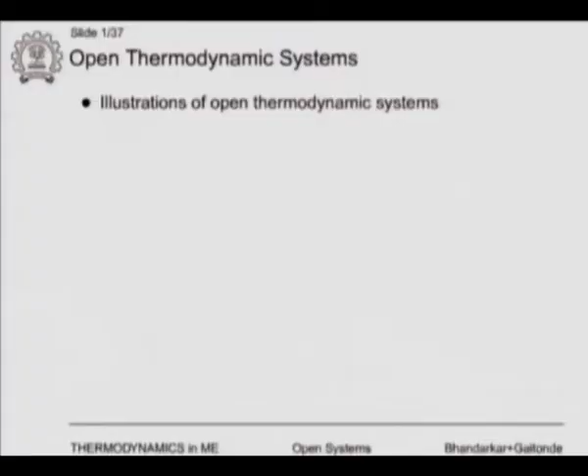Initially we will have a few illustrations of open thermodynamic systems, then we will take a specific system, just one system where we will study and derive equations, and then we will come up with a very general equation which we can use later. Finally, we will apply it to typical engineering systems like turbines, boilers, etc., and finally come to the numerical exercises, those problems.

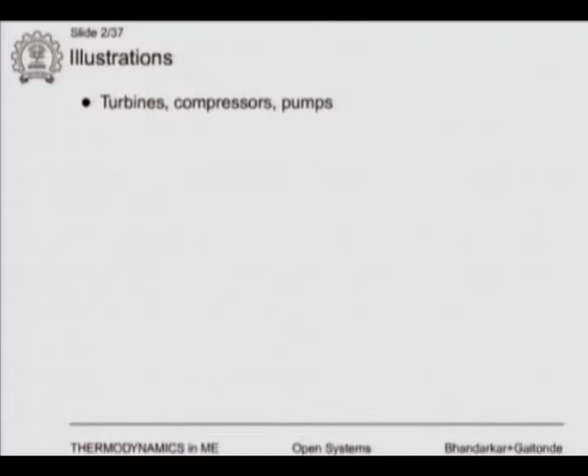So illustrations now. Typical examples: turbines, compressors, pumps. These are used in power plants, in refrigeration industries, fans, boilers, condensers, heat exchangers. All of these are used in various engineering applications. Power plant is a typical example which will have nearly all of these: boilers, condensers, heat exchangers.

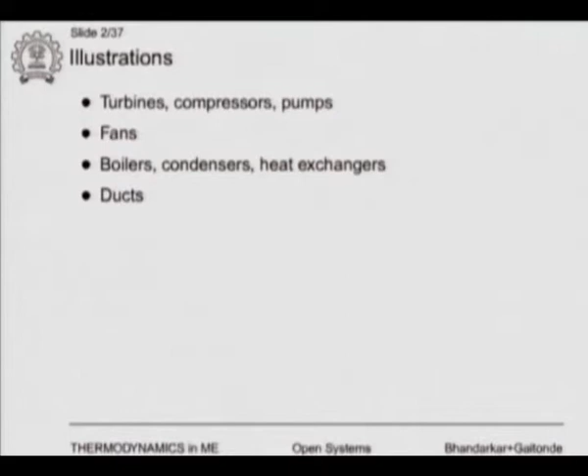Ducts, rooms and buildings, and then other systems like car and human being. These are also, you can consider as open systems, but we will be primarily looking at the first four of these, because these are more typical engineering applications, and we will see how to apply our analysis to these kind of systems.

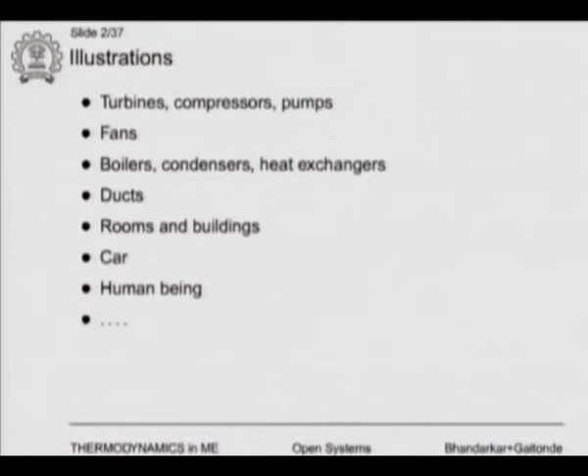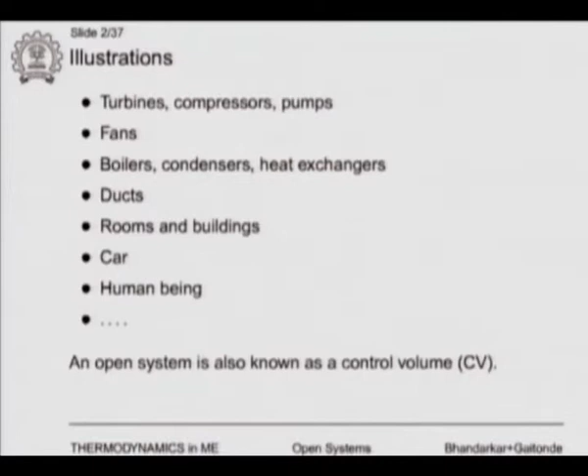So in normal parlance, an open system is also called a control volume, and you must have seen such a thing in fluid mechanics, where people would draw a sort of control volume and show lots of inlets and outlets out of this control volume.

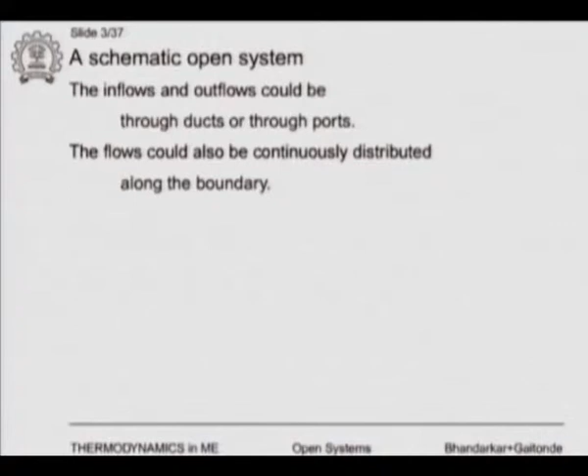So in a typical open system, we will see that there are inlets, outlets, or it could be you are probably analyzing a particular volume in space, where all through each boundary there may be inflow and outflow happening. So this is what we would typically call a control volume.

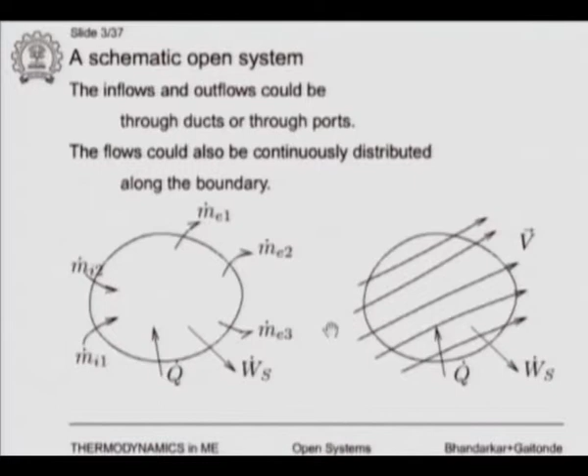If I show you a diagram which is coming from, which you probably would have seen typically in fluid mechanics, some kind of arbitrary shape, we can draw a lot of mass coming in and out. M dot I1, m dot I2 are inlets, m dot E1, m dot E2 are outlets. There could be work, there could be heat transfer, or the whole boundaries we could have inlets and outlets. This is what a typical control volume would look like.

So if this is what a typical control volume will look like, what we are going to analyze is a very simple system, and we will see that this will work for us for most of our applications. This is a very simple open system that we are going to show, a control volume.

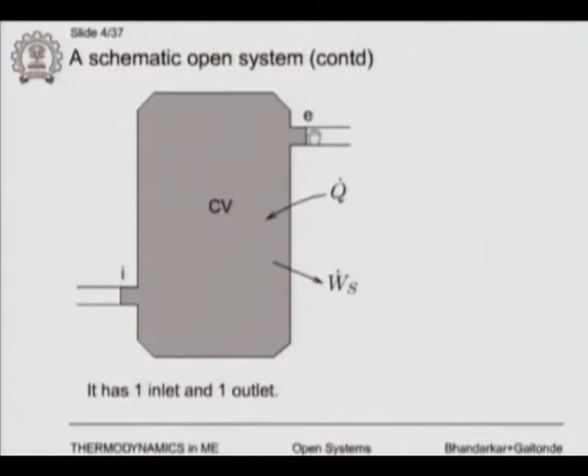So what is shown on the slide right now is just a system with one inlet and one outlet. All the shaded area is what is called the control volume, and it has been named CV. Where you can see the port mentioned I, that is the inlet, and where it is mentioned E, that is the outlet. We are also showing that we can have heat transfer and work transfer, the Q dot and W dot.

So let us look at the situation now. The control volume would have, of course, a volume V, a mass M, an energy E, and entropy S. These are properties of the control volume, and as you can see, we have put in the brackets the time t, because with time all of these could be changing. So volume, mass, energy, entropy, all these are functions of time.

Then we have the fluids at the inlet and exit, and we assume that they are in local equilibrium. That means they will also have their own properties which can be clearly defined. So the fluid at the inlet will probably have its own temperature, its own energy, its own entropy, and they can be well defined, and that is the case even with the exit fluid.

Okay, and we are going to assume that the situation at the inlet and exit is one dimensional and everything is uniform across a cross section.

Now if you have more than one inlet and outlet, you can model each of those, or if you have continuous inlets and outlets, what we normally do is take small areas on the surface, and each of these is usually modeled as 1D, and it suits our purpose to do it this way. But right now we have a situation with only one inlet and one outlet, and what we model is that everything coming in is one dimensional, everything going out is also one dimensional.

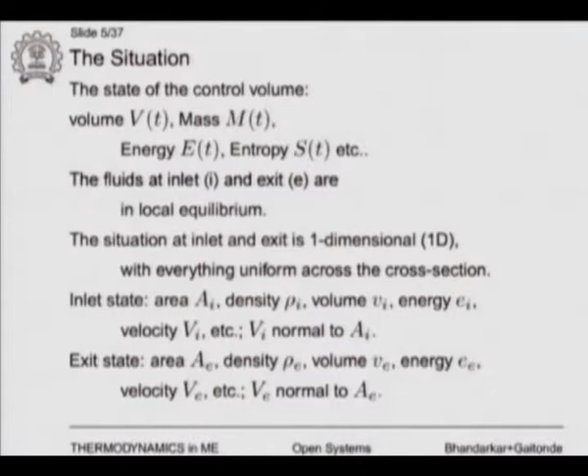And for the exit, we will have exactly the corresponding properties for the exit, that is the area AE, exit area, and then the density, specific volume, energy, velocity, etc., which correspond to the exit properties. So these are as far as the system properties are concerned.

How is it interacting with the surroundings? We will have, as with any system, some heat transfer interaction with the surroundings, and there may be some work transfer interaction with surroundings.

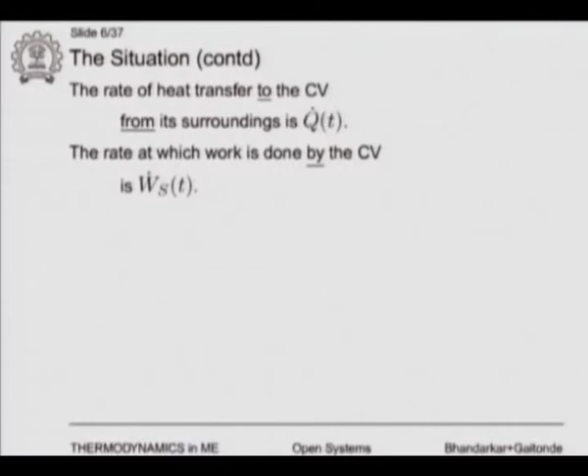So the work transfer that has been displayed on the slide has a subscript S. Typically this stands for shaft work, but we will say this is all the kinds of work that is done by the control volume, which includes maybe expansion, maybe stirrer work, etc., but it does not include the work that is required to push the fluid inside at the inlet and to push the fluid outside at the exit. So WS includes all those components of work, and we require some work to push the fluid inside the control volume and some work to push the fluid outside the control volume, and we will see how to take care of this. Otherwise W dot S includes all other kinds of work which does not include these.

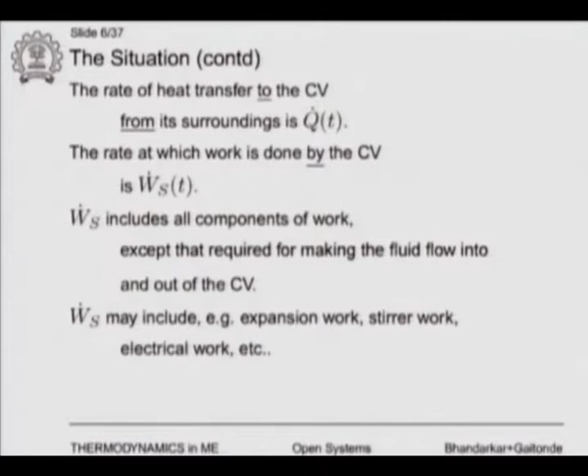The amount of volume or the amount of mass in these two plugs need not be the same. It is just that this is the exact amount. Let's say we are monitoring the control volume for a fixed amount of time delta t, then this is the exact amount which will come in that small delta t time. So the inlet plug corresponds to the amount of mass which will come into the control volume in the small time delta t, and the exit plug corresponds to the mass which will leave the control volume in the small time delta t.

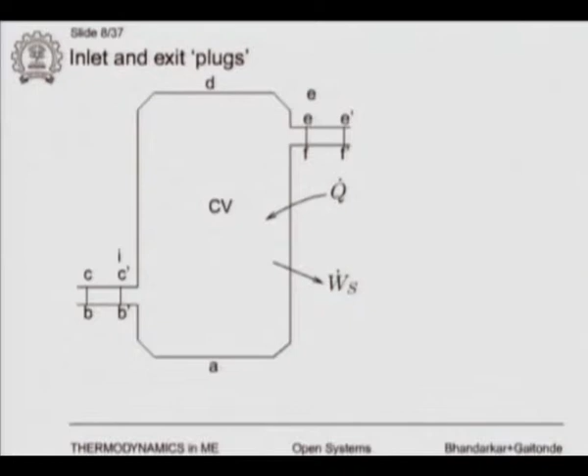We have still shown q dot and w dot in this figure. Now we are going to put alphabet labels so that we can define what the system looks like at different points in time. So you will see that there is a system which let me now shift to the paper. I will just show you what we have put here.

So this is the inlet plug here. We are naming, we are going to include this much part along with the CV at time t. So that is what is being done here. So this CB is the start at time t, and similarly EF is at the start of time t. So basically we are going to consider a system that not only includes the control volume but also the plugs.

So at time t we will choose the control volume plus the inlet plug and not the exit plug, and at time t plus delta t we will no longer have the inlet plug but will have the outlet plug. So how does this look like?

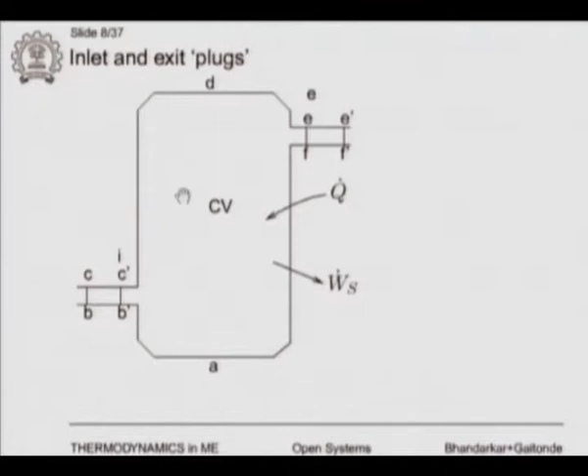So at time t we had the mass in the control volume plus the mass in the inlet plug. At time t plus delta t, see this boundary here, BC gets pushed to B dash C dash, and an equal amount of mass is getting pushed from EF to E dash F dash.

So what we have is that the mass in the system at time t, the system includes at time t CV plus the inlet plug, that mass is the same as the mass in the system at time t plus delta t, and the system at time t plus delta t is exactly having the same amount of mass.

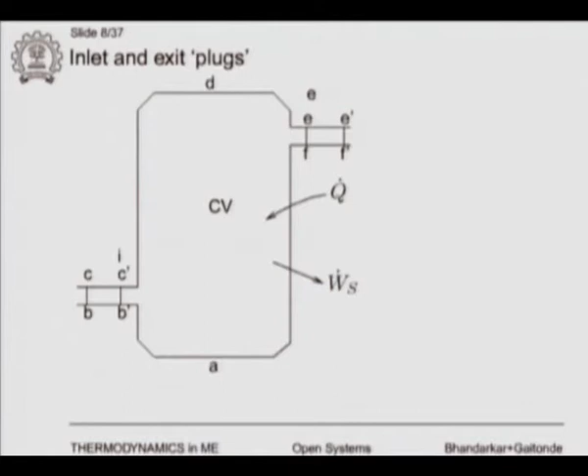It is basically, we have considered a system, when we consider A, B, C, D, E, F, we are considering a system across which no mass is flowing, because all that has happened is that BC, as if there is a piston at BC which has pushed the mass up to B dash C dash, and an equal amount of mass is coming out from EF to E dash F dash at point t plus delta t. So this is what has happened.

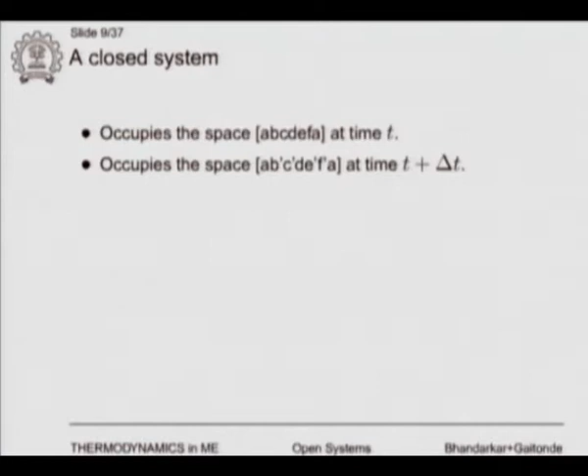So basically this closed system occupies the space A, B, C, D, E, F, A at time t, and it occupies A, B dash, C dash, D, E dash, F dash, A at time t plus delta t. So no mass is flowing across the boundaries of the system at this place, this is a closed system, and we are going to apply our normal equations, the first law and second law, to the closed system, because we know how to do it, and we will see how we can now correlate this to the control volume, which is the volume without the inlet and the exit plug.

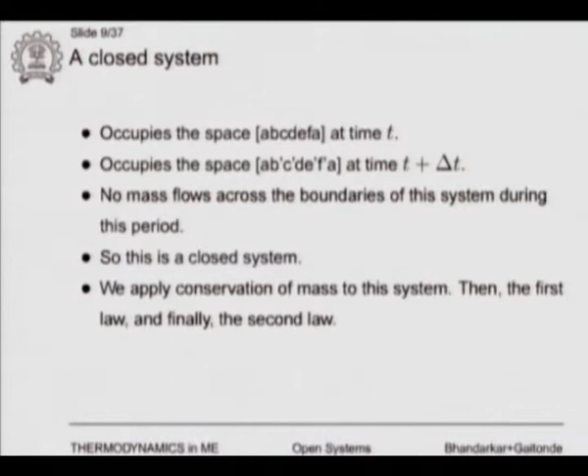So this is a closed system, as I said, and we can apply not only the first law and second law, but initially we will have to apply the conservation of mass to the system, and we will see how this is going to happen.

So just to refresh, this is the system in the initial state, which is A, B, C, D, E, F. So everything that is shaded, which is the control volume plus the inlet plug, this is the system at time t. And if I see how what has happened at time t plus delta t, all that has happened is B C has been pushed to B dash C dash, and E F has gotten pushed to E dash F dash, and the mass within this has remained the same.

No mass is crossing any boundary. In fact, it is just the same mass which we are analyzing. So this is what it looks like at t plus delta t. You can just see what has happened, you have pushed from here to here. That is all that has happened between the initial state and the final state. So this is the initial state and this is the final state, and this is how the system looks at time t plus delta t, and q dot and w dot s have been drawn as before.

So now we will look at the process and interactions.

The mass, we can say, is put into the system. At time t it is Mt, and at time t plus delta t it will be M at t plus delta t. Of course the mass is not changing, but we are just denoting the quantities in the system, which are mass, energy, volume, entropy, existing at time t and at time t plus delta t.

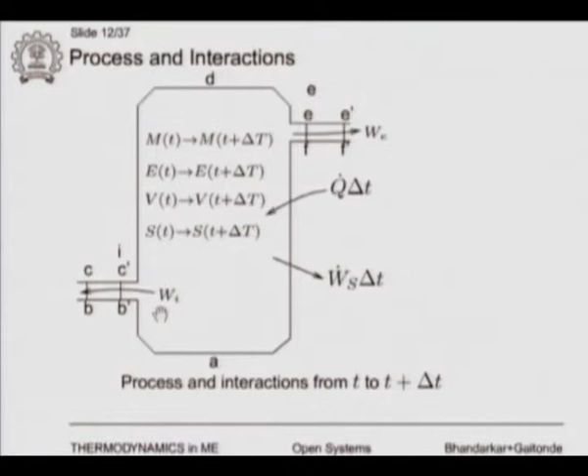I think now I will just shift to using the whiteboard.

So if I look at the conservation of mass, let us see what has happened. We will look at conservation of mass. If I had looked at the system, the system is...

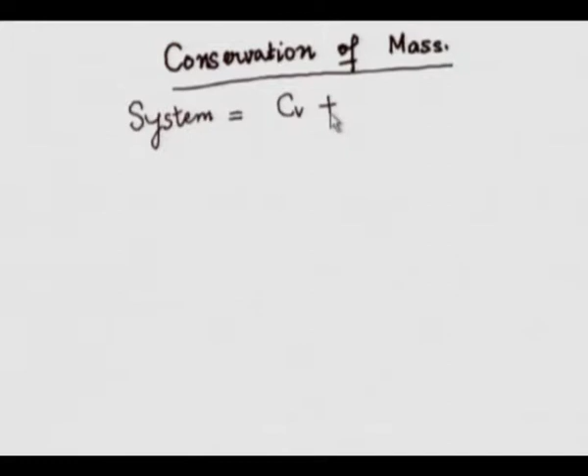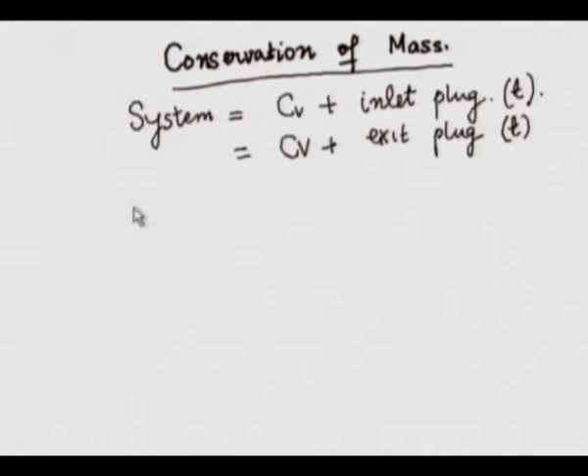the CV plus the inlet plug at time t, and it is CV plus exit plug at time t plus delta t. So the mass in the system, M system at T, is actually equal to M system at T plus delta T.

That is because all that has happened is really the inlet plug got pushed into the system and an equal amount of mass got pushed out, and it is really the same mass, and it was a closed system as far as we are concerned. If we consider that as a system, really no mass has crossed the boundaries, and what has really happened is that the mass is the same.

Sorry, there is a mistake here, I should have written T plus delta T. So M system at T is nothing but M of the CV plus M that exists in the inlet plug.

And M system at T plus delta T is just MCV at T plus delta T, plus M which exists in the exit plug.

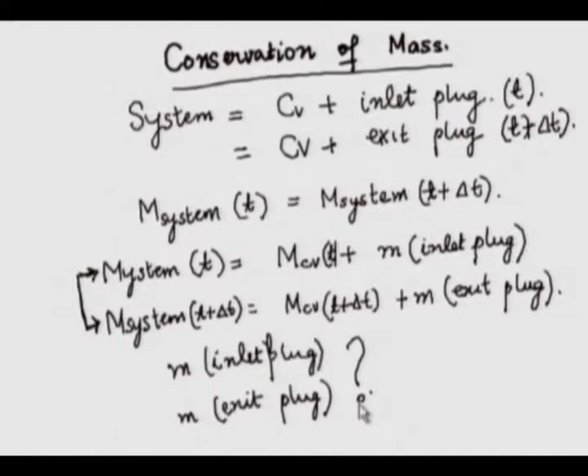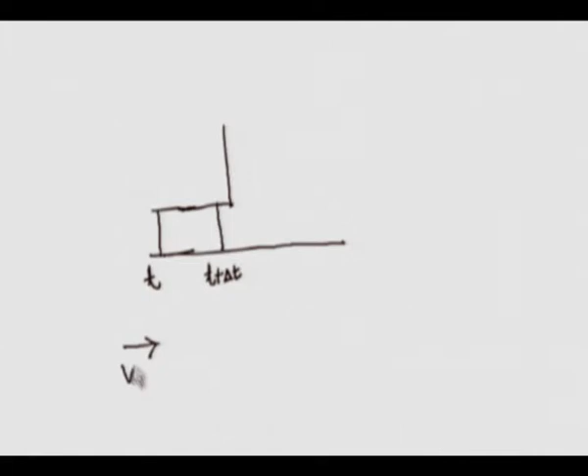So if I just want to look at what is happening at MCV T and MCV T plus delta T, I should just figure out what is M in the inlet plug and what is M in the exit plug. So if I look at the inlet, I had T and T plus delta T. The fluid was entering at a velocity Vi, and the area here is Ai.

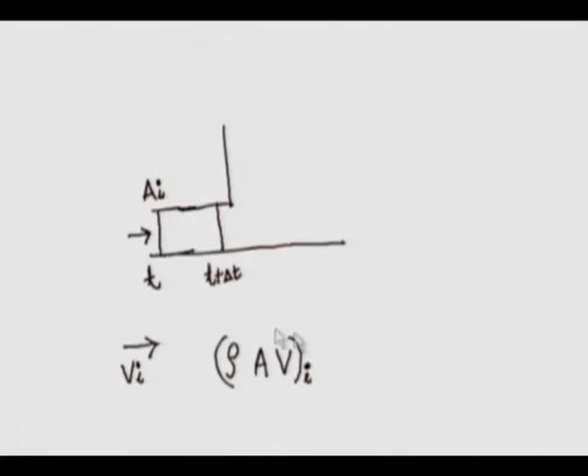So what has really entered into the system is rho multiplied by A multiplied by V, all at the inlet, and this is the rate at which the mass is entering.

What you can say is that this cylinder's length is just V times delta T, where this is Vi, and the volume of the cylinder is just Ai times Vi times delta T, and the mass in the inlet plug is just rho I times Ai times Vi times delta T. So this is the mass at the inlet.

Similarly, I will have a mass in the exit plug which will be just rho E multiplied by Ae multiplied by Ve multiplied by delta T. So, this is what is really happening at the inlet and exit.

So, if I say what has happened here, let me go back to the document now. This is the conservation of mass. So, I am just telling what I have already said. M system at T plus delta T is M system at T.

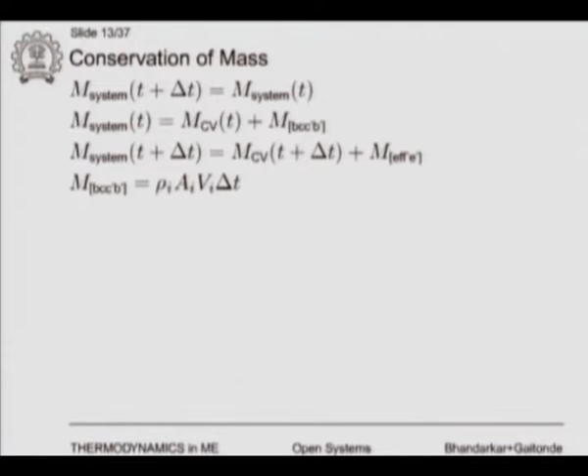M system at T is just the mass in the control volume CV plus the mass in B C C dash B dash, which is the inlet plug, and M system at T plus delta T is just the mass in the control volume at T plus delta T plus the mass in the exit plug. And I have already told you that the mass in the inlet plug is just rho A V at the inlet multiplied by delta T. Similarly, I can write a similar expression at the exit.

And if I see what the first equation is, the mass in the system is the same at T plus delta T and T. So, I will just equate: this is mCV at T plus delta T plus rho AV delta T at the exit. This is the mass in the system at T plus delta T, that is the same as the mass at T. So, this is what we have just written.

And if I just write an expression for mCV, all I do is divide by delta T. So, I am getting an expression only for the mass, the change of mass in the CV. So, mCV at T plus delta T minus mCV at T divided by delta T is just rho AV calculated at the inlet minus rho AV calculated at the exit.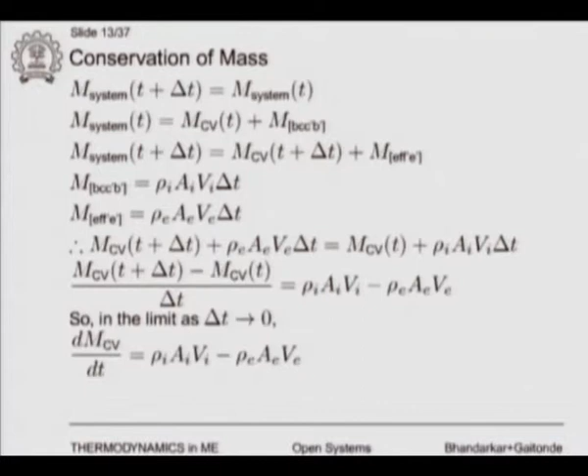Now, what I do is just take the limit as delta T tends to 0. This is the typical way in which if I take the limit, I get the differential. So, I can just write the left hand side as dm by dt for the control volume, which is just rho AV at the inlet minus rho AV at the exit.

So, I hope you realize what happened. The mass in the system was not changing, but the mass in the control volume could be changing depending on how much came in and out.

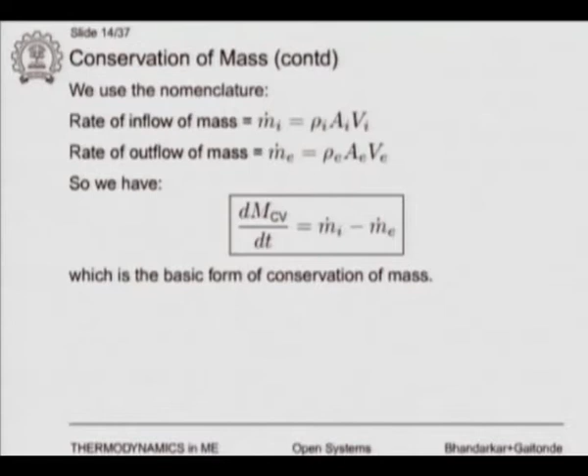So, what we call, just for short form, we will call rho AV at the inlet as m dot I and rho AV at the exit as m dot E. And finally, we have the previous expression where we had dm by dt of the CV as rho AV inlet minus rho AV outlet. We are writing that as m dot I minus m dot E.

So, this is what we call the basic form of the conservation of mass. You have of course seen this earlier. This is similar to expressions you would have seen in fluid mechanics.

All that we are saying is that the mass in a fixed control volume, the volume does not change. The mass in the fixed control volume changes because there will be a difference in what is coming in and what is going out.

If more comes in than what goes out, then the mass in the control volume will increase. If less comes in than what goes out, then the mass in the control volume would reduce. So, that is all that is happening.

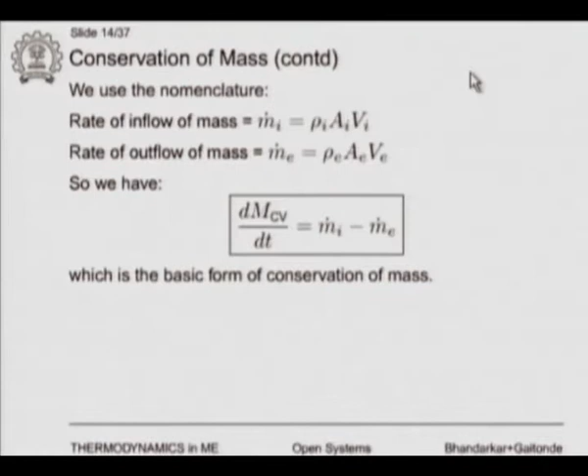There is no mass getting created. We are not talking of a possibility where mass can get created. If such a possibility existed, then dm by dt would have increased just because of production of mass, but there is no production or destruction of mass. All that is happening is the mass in the CV changes with time, just if there is a difference in what is coming in and what is going out.

So, now what we will do is have a similar explanation for the first law. We took the conservation of mass first, now we go to the first law. The first law as far as the closed system is concerned was what we wrote earlier as delta E is Q minus W.

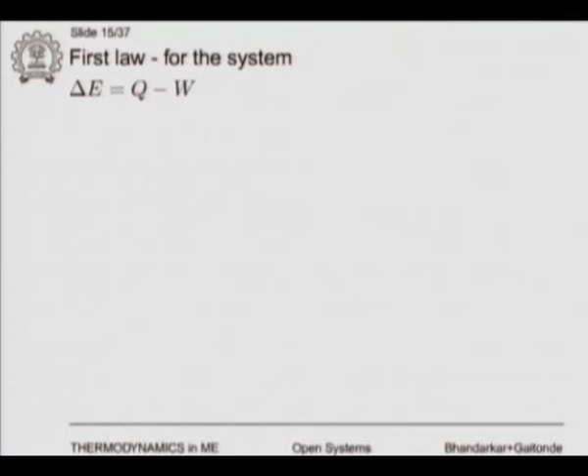So, if a closed system undergoes a process, then the delta E of the system, after or at the end of the process, is equal to Q minus W, where Q and W are the heat and work interaction that the system had with its surroundings. So, in our case, if we consider the same system, the system is a closed system, as we said, such that let us say it underwent that process whatever we decided in time delta t.

So, let me get back to the whiteboard again. So, there was the system.

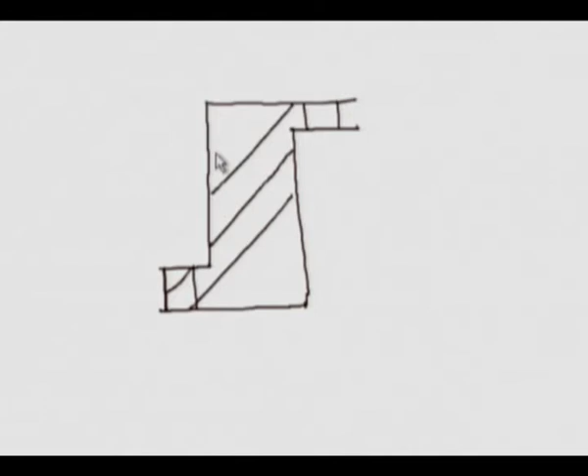Okay, so the system initially was here at time t. This is what the system looked like at time t.

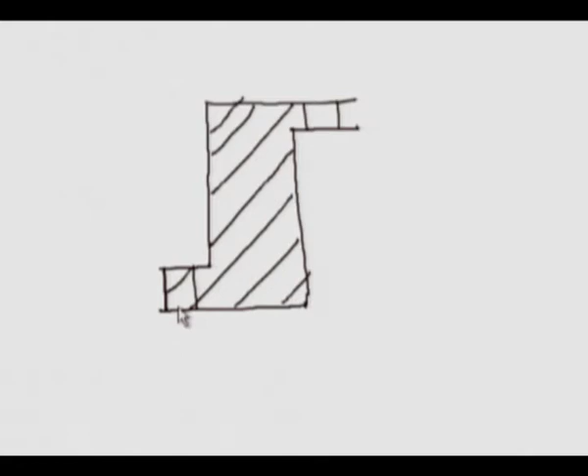At time t plus delta t, the mass within the system is the same, it is a closed system. All that happened was some boundary at the inlet got pushed in and some boundary at the exit got pushed out. That is one of the processes that the system has undergone. This is the system at time t plus delta t, one of the processes that occurred during the time delta t.

So what we are trying to figure out is what is the change, or what is the process that has happened from t to t plus delta t. So one of the changes is the inlet got pushed in and the outlet got pushed out.

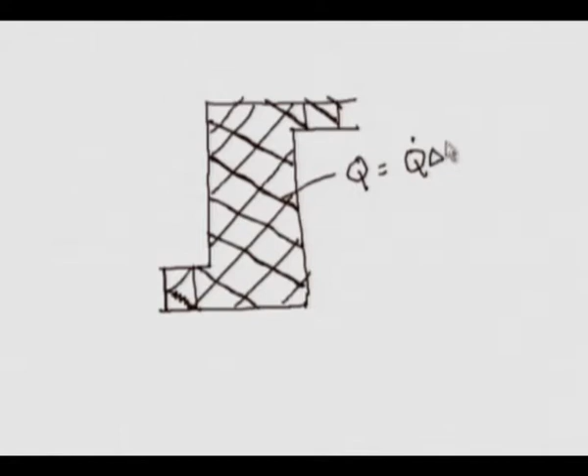The other thing we said is there is a Q interaction, that Q interaction is nothing but Q dot times delta t, so we will just show it with an inward arrow. If it is negative, it means the system was losing heat to the surroundings. Otherwise, if it is positive, it means it was gaining heat from the surroundings. And this is the shaft work which we are showing.

As we said earlier, this work is all other work that the system is doing apart from the flow work, which was this work. This is what we call the flow work, where there is work required to push the inlet boundary in and the work required to push the outlet boundary out. Apart from this, whatever other work the system may be doing, we have put in Ws. So this is all the other kind of work.

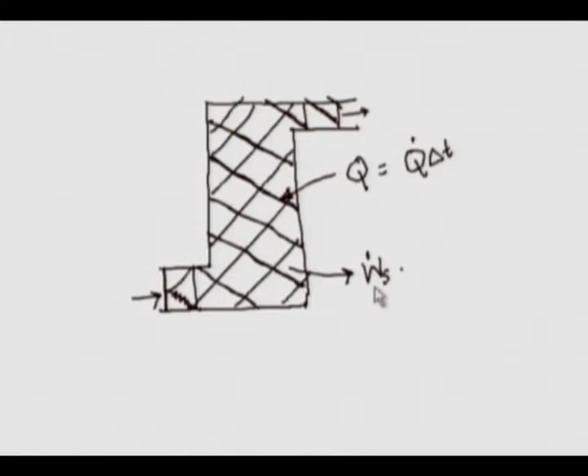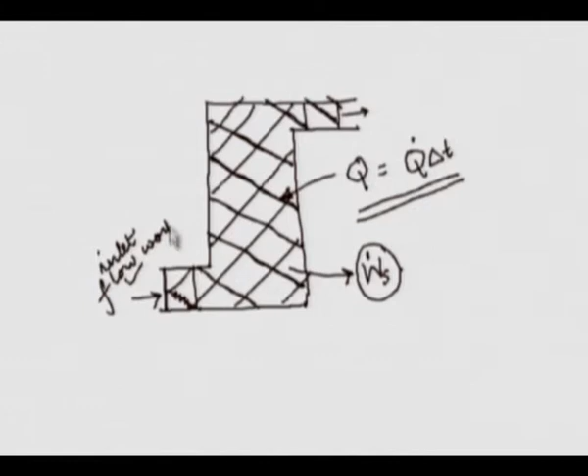So if we want to know what is the net Q and W interaction: the Q interaction is entirely here, and the W interaction is all these other works plus the inlet flow work and the exit flow work. These are the Q and W interactions that the system is undergoing, and because of this there is a change in delta E, which we can very clearly write with our first law here.

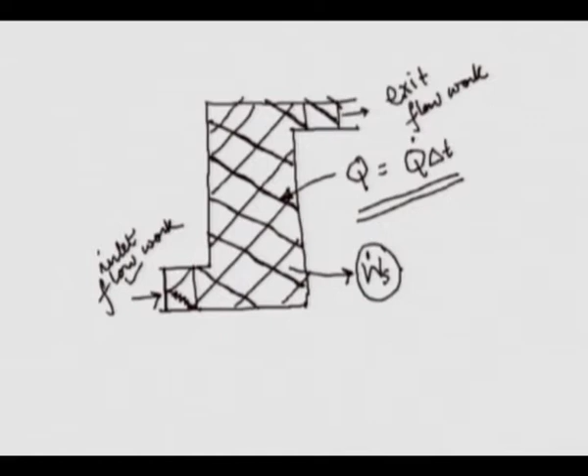So let me get back to the presentation again. So delta E, as we said, of the system, it has undergone a process during the time delta t. So delta E is just E of the system at t plus delta t minus E of the system at t.

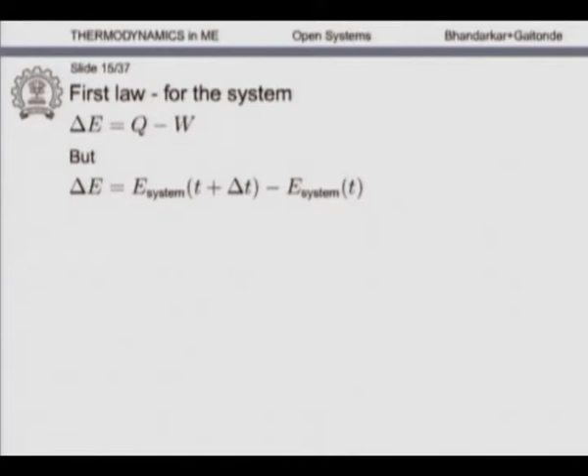And E of the system at t, you should know, is E of the control volume at t plus the energy of the inlet plug. I mean, that goes without saying. So at time t, whatever was in the system, it is the energy of the control volume plus the energy of the inlet plug. We are taking care of the fact that the inlet plug may have slightly different properties and a different energy, but the net energy of the system is the energy of the control volume plus the energy in the inlet plug.

This is the energy of the system at time t, and energy of the system at time t plus delta t is just again the energy in the control volume plus the energy in the exit plug, because the system really is occupying the control volume plus the exit plug at time t plus delta t. So if we take the difference of these two energies, we will get the delta E of the system.

And we can write similarly what the energy of the inlet plug is. It is just the mass of the inlet plug. We had figured out that the mass of the inlet plug was just rho AV at the inlet multiplied by delta T, that is the mass, and the energy is just that mass into its specific energy EI. So this is the total energy in the inlet plug.

We can have a very similar expression for the energy of the exit plug, that is the mass in the exit plug, which is rho AV calculated at the exit times delta T multiplied by the specific energy EE. So this is the total energy in the exit plug. So delta E is just the difference.

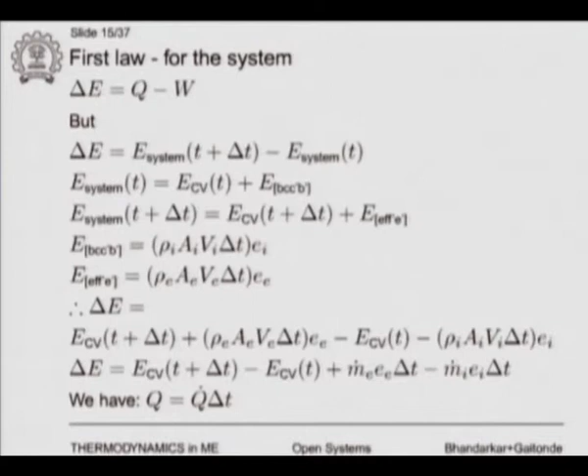As I mentioned, Q is just Q dot times delta T, that is the rate at which Q is entering, assuming that is constant. So in a small time delta T, we can assume Q dot is constant, and Q dot times delta T is the Q interaction that the system is having during the time delta t, and we have already discussed what the W interaction is.

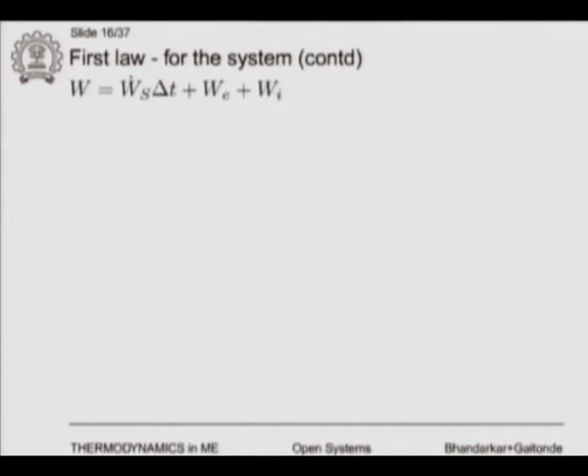So the W interaction consists of W dot s times delta t, that is the work interaction that the system is having, which is not including the flow work at the inlet and outlet, and W e is the work at the exit, that is the flow work, and W I is the flow work at the inlet. So these are the three components of the total work interaction during the time delta t.

So now we come back to what is happening, or how do we calculate W e, that is the work interaction at the exit. So you see what we have written, an expression as P A V times delta t.

So all that is really being written is P delta V here. A e is the area, V e is the velocity here. So V times delta t is the length of the cylinder, and A times V times delta t is actually the volume that has been displaced. So P times delta V.

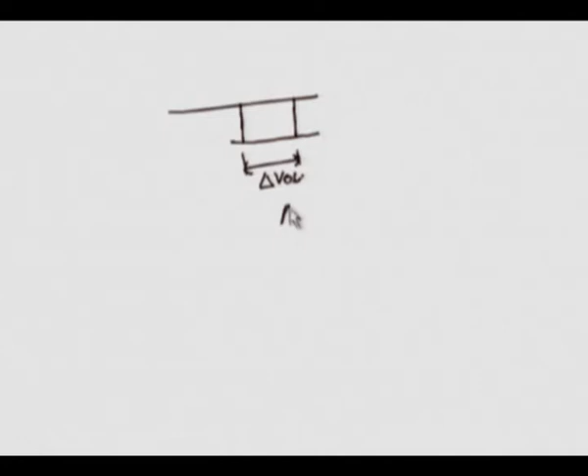So I will again just show the whiteboard. So at the exit, what has happened is you have pushed this from here to here. So this is the delta volume - let me just write it as volume, because V was being used for the velocity. So this is just A times the length of this delta volume, this is exit. So it is A exit times L exit, the subscript is E, and L E is just V E, this is velocity.

Times delta t. So this is the P delta V work which has occurred at the exit, and similarly there is a P delta V work which is occurring at the inlet.

As I have mentioned earlier, the way you can look at it is the system is actually probably performing work on the surroundings by pushing the exit plug out. So if you look at it from the system's point of view, that will be positive work, and the surroundings are actually pushing the inlet plug in. So that P delta V work is actually the work being done by the surroundings on the system, and that can be considered as negative work as far as the system is concerned. So this is what has happened as far as the work interaction goes.

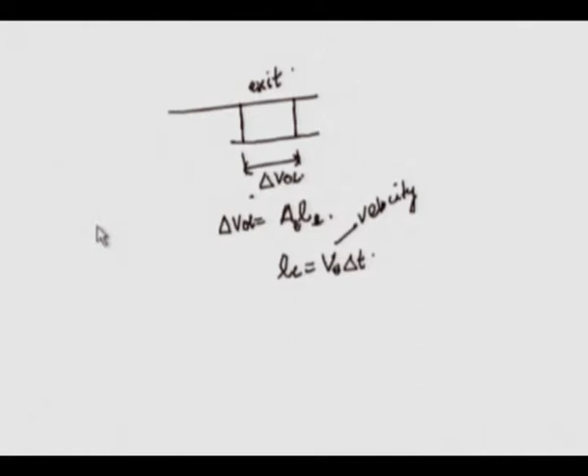So let me come back to the document again. So here we have an expression for W e, that is the work done at the exit plug, that is for pushing the exit plug out, that is W e, which we call the flow work at the exit, and W I, okay, we have written suitably with the negative sign here.

Normally, if you want to work vectorially, you would have just seen that the normal vector for the area A I and V I are actually opposite each other, and A dot V would have automatically given you the negative sign here. But we are just going ahead and putting the negative sign to show that it is a negative work interaction.

And so finally, what we have is the total flow work, that is W e plus W I, is just m dot e P e V e. The m dot came in. You see we have already substituted P A e V e delta t, and we have substituted it instead. A V delta t we have put as, this is the specific volume V e by m dot e, because rho A V or A e V by specific volume would have been the m dot.

So, A e V e is just nothing but m dot e times the specific volume. We have substituted A e V e with m dot e into specific volume here, and the same thing at the inlet. What we've done is write the expression in terms of m dot, because in the mass conservation equation, to simplify, we had written dm by dt as m dot e minus m dot i. So we wrote everything in terms of m dot e and m dot i. We're doing a similar exercise here, making the expression simpler. So this expression is only the flow work: m dot e P e V e times delta t, minus m dot i P i V i times delta t.

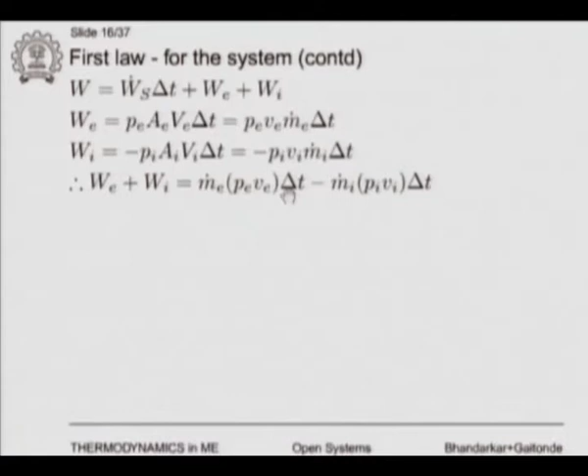So the first law, finally, we have all the components for the system in place. It was a closed system, so delta E is just Q minus W. Delta E is calculated by figuring out the energy of the system at time t plus delta t and subtracting the energy at time t. The delta E that the system sees is E at time t plus delta t, which is E CV at time t plus delta t plus the energy of the exit plug, minus the energy at time t, which is E of the control volume at time t along with the energy of the inlet plug. So this is the delta E for the system, assuming it has undergone a process in this time delta t.

And delta E is just Q minus W. Q is nothing but Q dot times delta t, where Q dot is the rate of heat interaction, so Q dot times delta t is the net Q during time t. The net W during time t is W dot S times delta t, which is normally called the shaft work, plus the two flow work components. Appropriately we put the signs, so because of the negative sign, the m dot i P i V i term comes with a positive sign. So delta E on the left hand side equals Q minus W, where Q is only the first term and W has three components: the shaft work and the two flow work components at the inlet and exit.

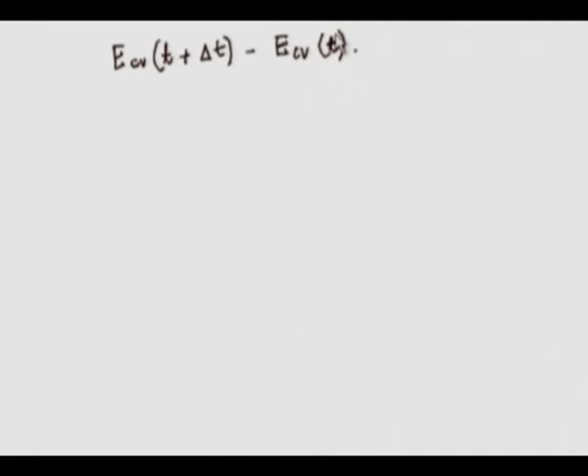And you will notice what we have done, let me write this again. We have written E CV at t plus delta t minus E CV at time t. So this is the delta E only of the CV, not of the system, but we are now trying to figure out how we can come up with an expression for E CV. So all we have done is put all the other terms on the right hand side.

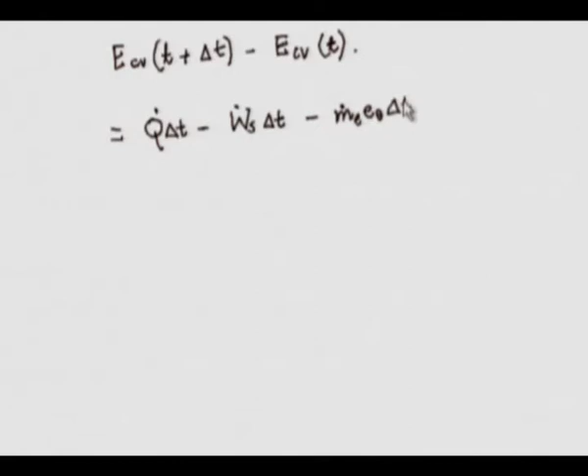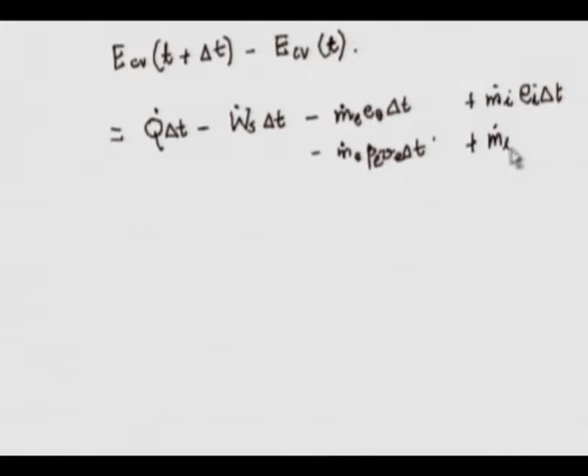This is Q dot times delta t, which was there from before, then a minus W dot S times delta t, and then a minus m dot e times energy E e times delta t, and we had from the left hand side an m dot e times P e V e times delta t. Similarly we had an m dot i times E i delta t plus an m dot i P i V i times delta t. So what we have done is combine this E e plus P e V e, and this E i plus P i V i, because these two are the same form.

So, we are just combining E plus PV, okay, and we realize immediately that this is a quantity which we have seen before, E plus PV, okay, and this is one of the reasons that enthalpy is defined.

Often in flow systems we will see that the combination of E plus PV is very common. You will come across it every time, and instead of writing a big expression for it, it is useful to invent a short form. So we just substitute H instead of E plus PV.

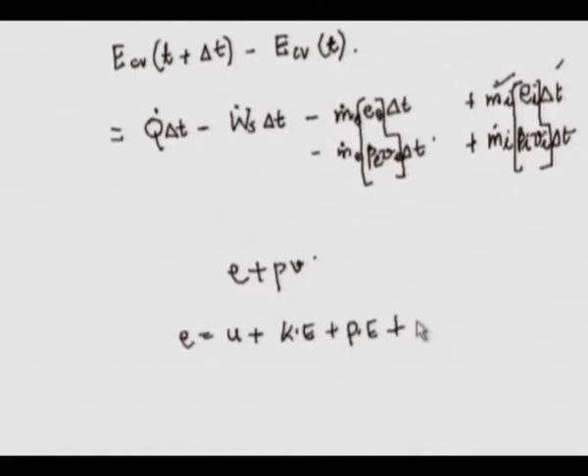Let me get back to the document. So, you will see in the last term here we have just combined, sorry, I think I made a mistake here earlier on the whiteboard. E plus PV is not H, but I can say E is U plus the KE term plus the potential energy term plus other energy terms, plus PV.

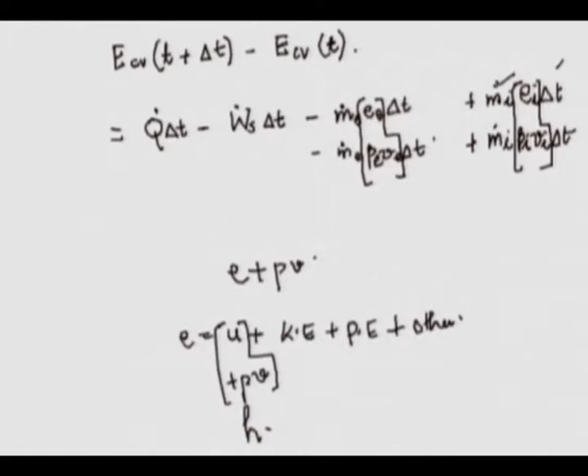So, once we have done the combining, we will combine this and come up with the H term. I am sorry, it is not E plus PV that is H, but U plus PV that is H. So, we have initially just combined it, and then we will ensure that U plus PV is taken together and we make H out of it. So, this is what we have done here.

First we have transposed and combined terms. We have put E plus PV together and we will separate out E into its components. So, that is what we are doing here.

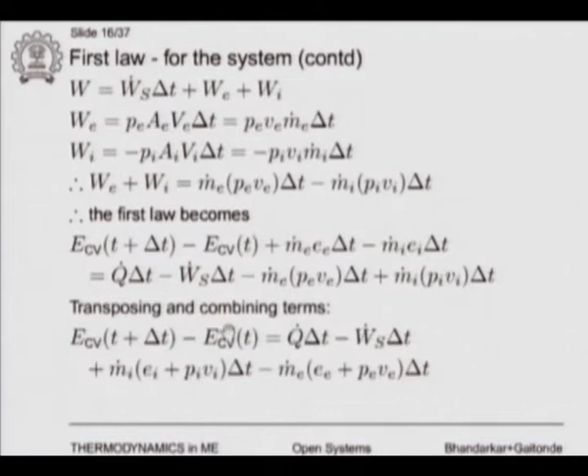dE_CV/dt is just Q. So, what we have done, if I look behind, I will divide everywhere by delta t and take the limit as delta t tends to 0. So, I will get dE_CV/dt here. This is what has happened.

So, everywhere the delta t has gone out and we get Q dot minus W dot is m dot times E plus PV at the inlet minus m dot times E plus PV at the exit, and E plus PV, as I said earlier, we are going to expand as U plus Vi square by 2 plus Gz.

Okay, so we are assuming that these are the components of the energy term. It is just the thermal internal energy U plus the kinetic energy plus the potential energy. If there is some other form of energy, we can add it to E, but right now we are assuming it is made of 3 components, and U plus Pi Vi, as I pointed out earlier, we are going to combine and say that is H.

So, finally, we get, instead of E plus Pi Vi, I can just write H plus V square by 2 plus Gz, all with a subscript i to denote at the inlet.

So, we will have the next term here, dE_CV/dt is just Q dot minus W dot, and this W dot is only the shaft work, it does not include the flow work. The flow work has been consumed into these inlet and exit energies, you can say. So, we had only m dot times E_i, and we just combined the flow work along with the energy here, combined it along with the U term there, and made it into H.

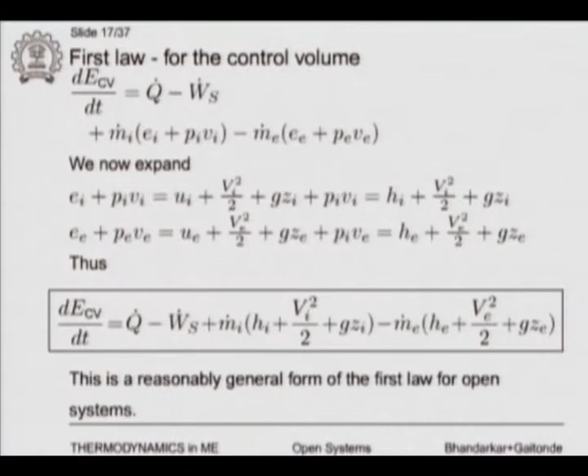So, we have just brought the flow work term into these inlet and exit components here, and this Q dot and W dot are now purely the interactions with the surroundings, we do not include the flow work. So, this is how we have formulated how the energy of the control volume changes as a function of time. This is a very general form.

So, what is to be done next now? We will have to take up the second law, and you can see the second law we can operate in more or less the same manner.

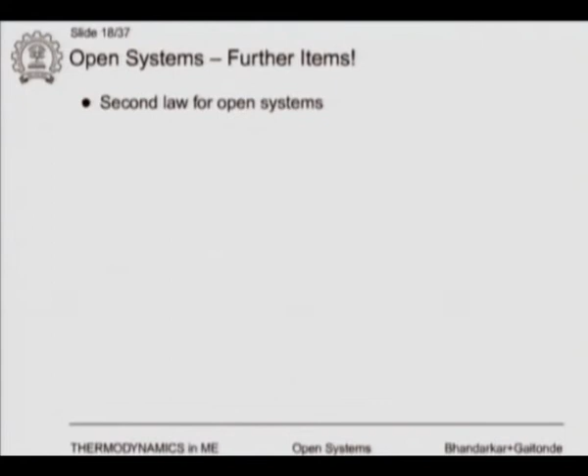That is, you take a control volume and you see what is the S of the system at time t, and you see what is the S of the system at time t plus delta t. So, the entropy of the system at time t would include the entropy of the control volume plus the entropy of the inlet plug. The entropy of the system at time t plus delta t would be the entropy of the control volume plus the entropy of the exit plug.

So, what we know from the second law is just that delta S is dq by T plus S dot p, or delta S should have been greater than or equal to dq by T.

So, we had just written it as an equation that delta S is dq by T during the time, plus S dot p, that is the entropy produced during that time.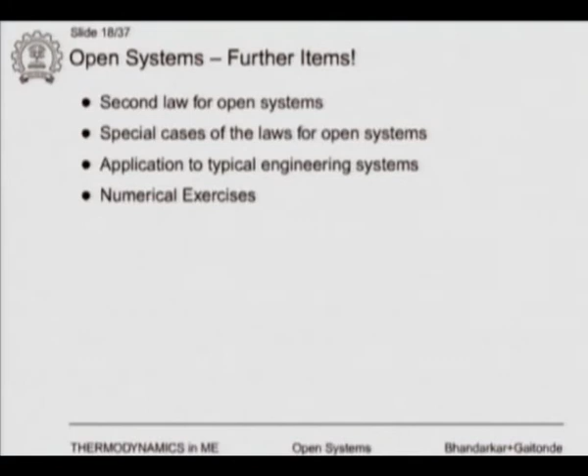So we can do a similar analysis. What we will do is just an analogy, and you will see that yes, it works the same. You should know what equation we are coming up with. So we will do the second law now by analogy, and take up special cases and then numerical examples. Let us see what we did again for a typical open system with one inlet and one exit, and we will just show a simpler schematic.

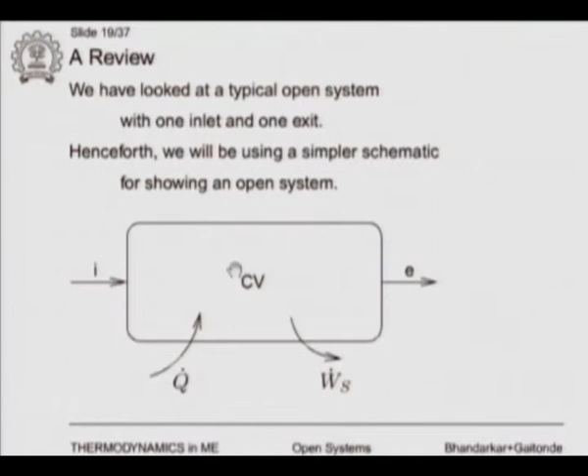This is one control volume which we have drawn. There is an inlet arrow I, there is an exit arrow E, and there is a Q and W. This is the second law for open systems.

So, as I said, we will use an analogy. For the conservation of mass for a closed system, we have dm by dt is 0, that is the mass of the system does not change. But when we applied it to a control volume, what we got was that the mass of the control volume, dm by dt, is just m dot I minus m dot E. So this is the conservation of mass for the control volume. For a system the mass did not change, for the control volume it would depend on the inlet and outlet masses.

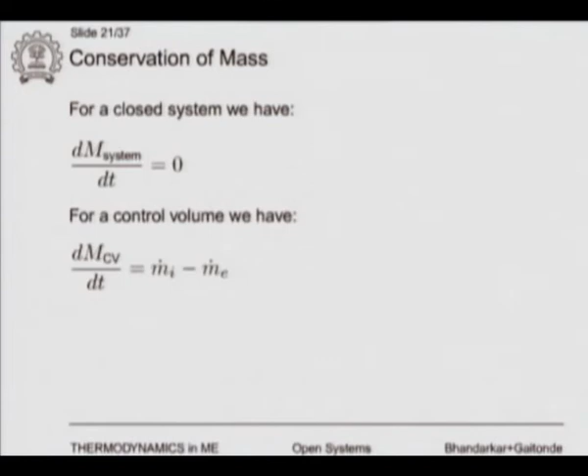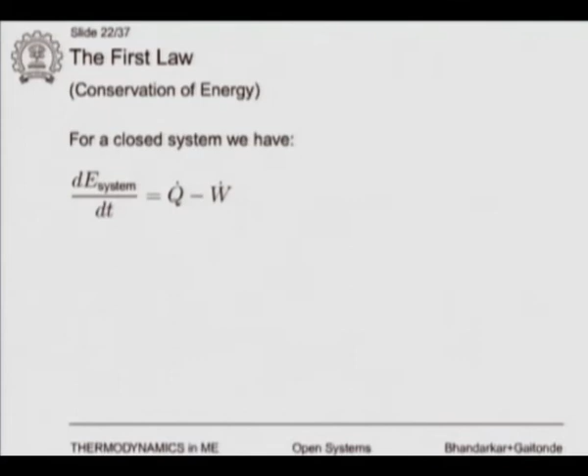For the first law, for a closed system, if it was just a process, we would say delta E is q minus w. Taking a differential, dE by dt is just q dot minus w dot. This is for the system. If I now separate out w dot and apply it for a control volume, I will see there are flow work components and energy coming in and going out. For the control volume, dE by dt, we get q dot minus w dot is m dot I times EI plus PI VI - that is the inlet energy plus the flow work at the inlet - and the last term is the exit energy plus the flow work at the exit. So this is the equation for the control volume, and we can do exactly the same for entropy.

You will realize I would have a term very similar to dS of the control volume by dt. For the control volume at time t, we had entropy is entropy of the CV plus the entropy of the inlet plug, so I should have a term similar to m dot I EI in the energy case. For entropy I would have m dot I into SI on the right hand side. Similarly, for the exit plug, I would have an m dot E SE term.

Now, there was a flow work term in the energy equation for the first law, but we do not have an equivalent term for the second law. So we will have dS by dt of the control volume equal to the Q interaction term plus the entropy production rate, and we would have the rate at which entropy is coming in through the m dot I SI term, and the rate at which entropy is leaving the system through the m dot E SE term.

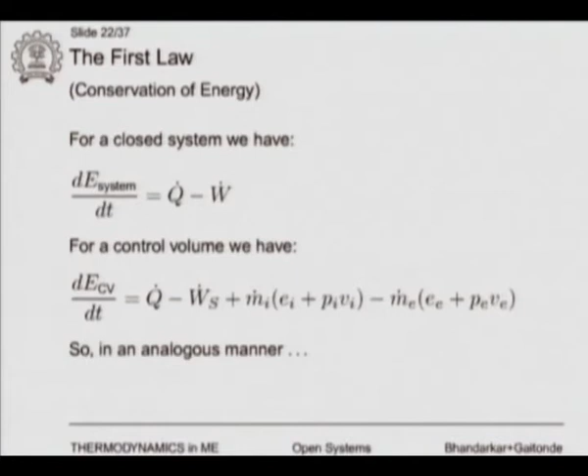Once we have come up with this equation, very often we will deal with situations that are in steady state. In fact, most of our engineering analysis is done on systems in steady state. For example, when we analyze a turbine, we analyze it when it is running at steady state. We rarely analyze transients, that is how it starts, how it goes from 0 RPM to whatever RPM it should run at. Such analysis is something we rarely do in our course.

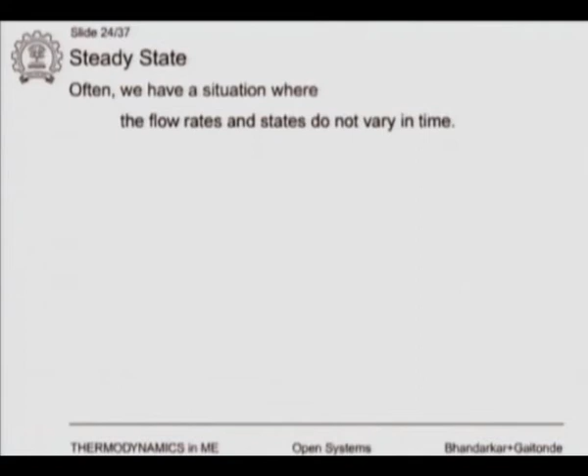We will not assume that flow rates are changing with time, or that the states within the boiler or turbine are changing with time. None of these change with time, and this is what we typically call a steady state situation. So, the inlet flow rate and the exit flow rate are constants. If we are extracting work from the turbine, we assume a steady state work extraction rate W dot S, which is a constant.

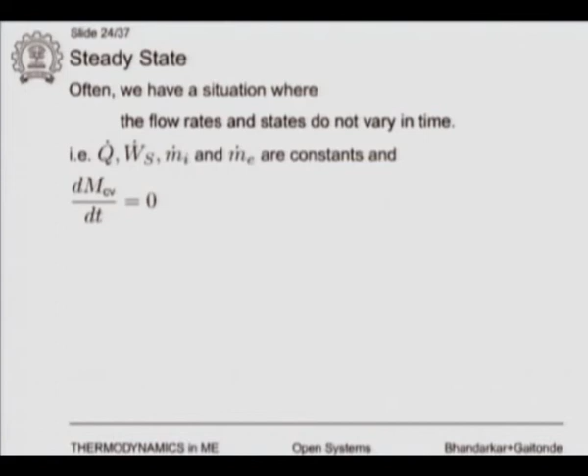If it is a boiler, normally there will be a Q dot interaction, and we assume that is constant. These quantities do not vary with time. As a result, in the control volume, m dot I and m dot E are not only constant but equal to each other, and the mass in the control volume does not change. If it were changing with time, it would not be a steady state situation. Similarly, the energy of the control volume does not change, and the entropy of the control volume does not change.

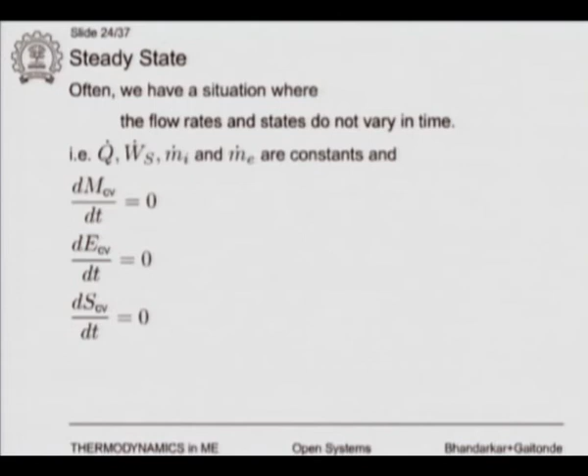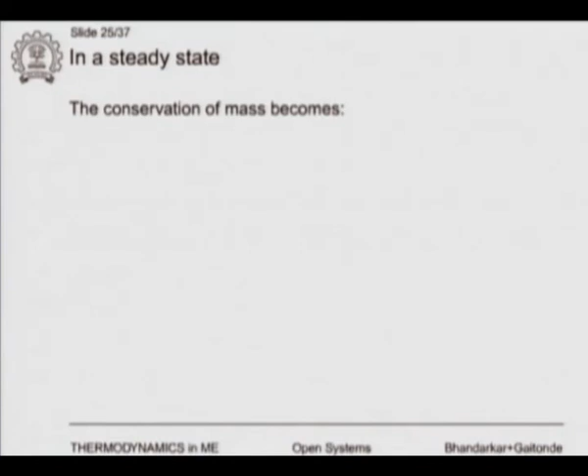So all the previous equations we wrote earlier for mass conservation, the first law, and the second law, the left hand side in all those equations would be 0. This is how we are going to analyze our situation, known as steady state. For conservation of mass, if the left hand side is 0, we had dm by dt equals m dot I minus m dot E. If dm by dt is 0, then m dot I is the same as m dot E.

Since they are the same, we might as well remove the subscript and just call it m dot. So with conservation of mass, there is just one m dot flowing through the system.

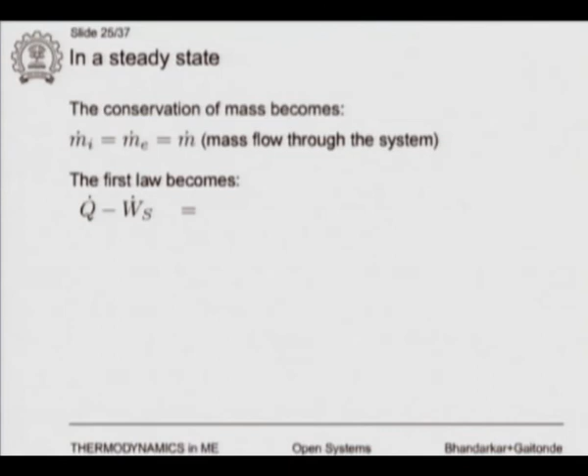The first law is dE_cv by dt equals q dot minus w dot minus m dot times h. That term, I would just transpose the q dot minus w dot on the left hand side, because the dE by dt term has gone, and I will have the remaining term which is q dot minus w dot equals m dot times H plus v square by 2 plus gz at the exit minus m dot times H plus v square by 2 plus gz at the inlet. So this is how it has become simpler, the left hand side dE by dt has gone out.

And in the second law, I will just write it as m dot times Se minus Si equals q dot by T plus S dot P. So the dS by dt of the control volume has gone to zero.

If you look at the first law, we have combined each of the kinetic energy terms, the potential energy terms and the enthalpy terms. So instead of writing m dot multiplied by something at the inlet minus m dot multiplied by something at the outlet, we will combine each of the terms He minus Hi and call it delta H across the system, or delta Ek across the system, which is just the change in kinetic energy of the system, and delta Ep across the system. So all that we are doing is just combining the enthalpy terms, the kinetic energy terms and the potential terms together.

And we will just write q dot minus w dot equals m dot delta H plus m dot delta Ek plus m dot delta Ep, and the second law we are just going to write as m dot times Se minus Si equals summation of q dot by T over all interactions plus the entropy production rate. So these are going to be our laws for the open system working in a steady state, and you should realize this is assuming there is one inlet and one outlet.

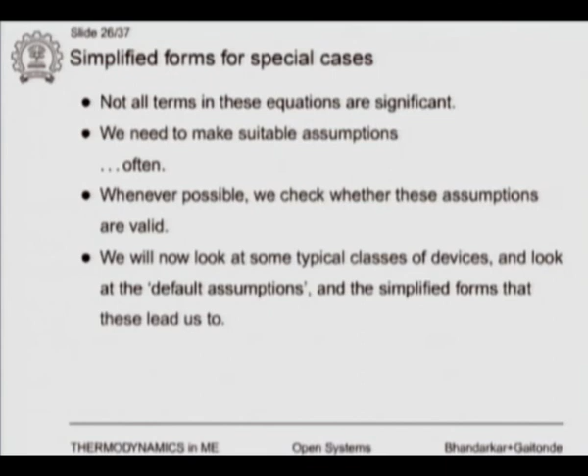But if the situation comes, you should realize that some of these assumptions must not be taken into consideration, and you should just initially start with the full expression for the first law and the full expression for the second law, and then see if you can really throw out a few terms. Because it is not too complicated, there are not too many terms in these equations if you see.

It is just a Q dot and W dot on the left hand side, and the difference in H, the difference in kinetic energy and the difference in potential energy. Similarly, in the entropy term, there is a difference in the inlet and exit entropies, a term which includes the Q dot interaction, and a term which is the entropy production rate. So you can always start with these equations and then decide what you want to throw away. In some cases, as we said, by default we will throw out a few of the terms.